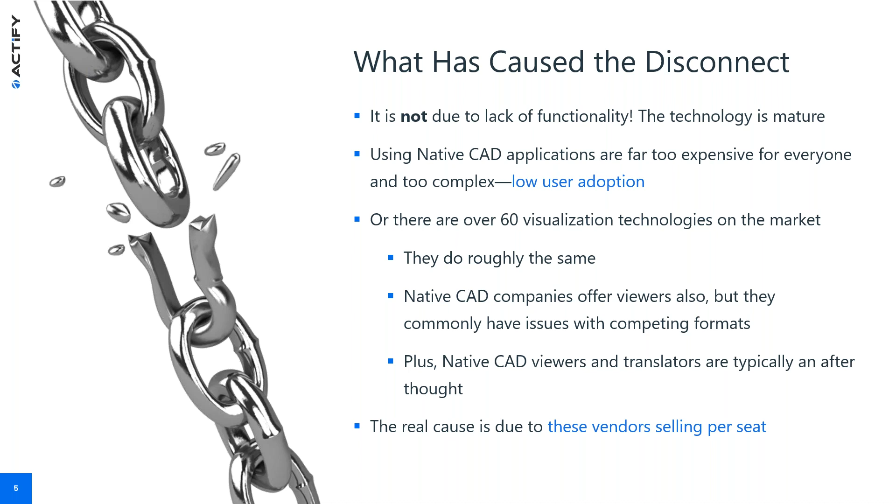So what does this mean to you? You forego goals, you ask who can go without, you limit access to product knowledge. Without access, users, managers find small budgets to buy from vendors of their choice to solve a niche problem. I've seen where companies have multiple vendors across the entire organization and they're unable to collaborate. Again, the real cause is that the typical vendors sell on a per seat basis and not an enterprise level. So they're limiting who gets access to the product data.

Traditionally, viewers have been licensed to a single workstation or concurrent user group. This has restricted access to users with the most immediate need. Actify's SpinFire Enterprise solution provides access to everyone, every device within an organization, which can be defined as a location, a division, or again, the entire enterprise.

When access to SpinFire is unlimited, sales teams mark up designs while meeting with their customers. Manufacturing and quality teams can check specifications and tolerances on the shop floor. And now everyone has design access to the design information. They truly do have a single version of the truth.

What if you could have employees access SpinFire at work, on the road, or at home to maximize productivity? Access SpinFire on every computer from the shop floor to the top floor corporate-wide. Access in conference rooms by interns, temps, consultants, management, and others. What if you could let everyone collaborate openly and measure from the same version of the truth? What would that mean for your business?

We have a lot of companies taking advantage of SpinFire Enterprise solution. I've seen where a company went from just a handful of users to over 20 plus users in a matter of a month's time. They're finding ways to get other individuals involved, and this is just one example.

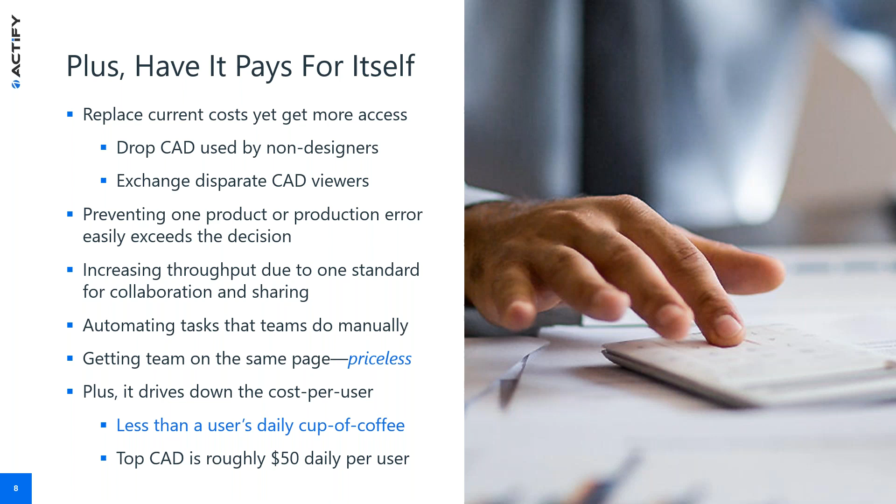Here's an example of one of our SpinFire Enterprise customers and the cost savings they've seen after purchasing SpinFire Enterprise. They're a tier 1 automotive supplier with 4 tech centers. They were able to terminate 43 native CAD licenses and gained unlimited SpinFire access at work, on the road, or at home. This supplier saved over $200,000 in annual costs by terminating those 43 native CAD licenses, and they were able to standardize on a vendor-neutral platform.

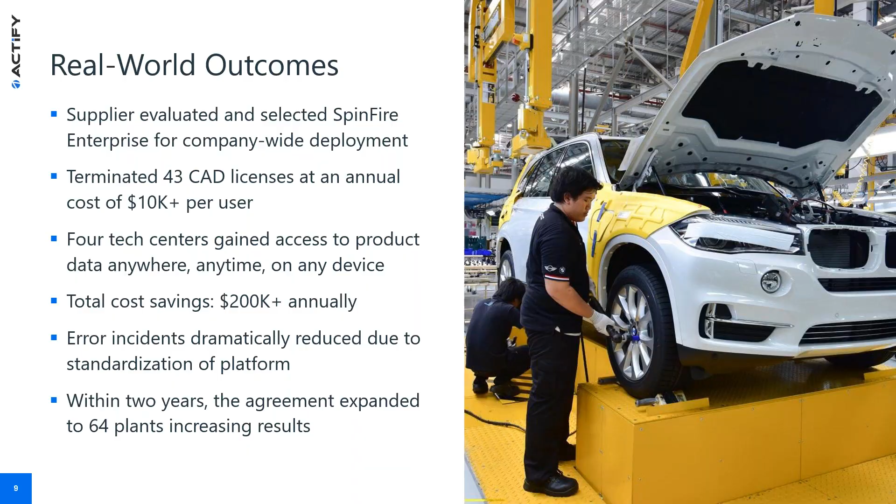Here's one comment from one of our customers using SpinFire Enterprise: 'Without special training, you can easily open, measure, and check data and important files. You can share your data with colleagues and customers.' The key takeaway here is it's one solution for the whole company.

Another product we recently announced is our CAD Publishing solution. The purpose of CAD Publishing is to publish data from a native CAD file for downstream use. Like SpinFire, it handles multiple native CAD formats and allows your organization to convert those CAD files, whether a single part or an assembly from a designated folder, into other formats like SpinFire Ultimate, an image or thumbnail, or formats like STEP, IGES, JT, and others.

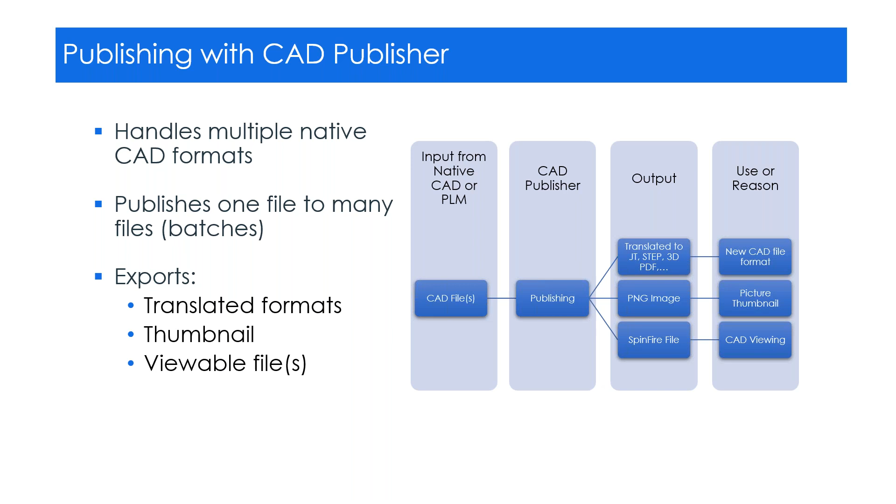To get started, I wanted to make a couple of announcements with SpinFire. We wanted to provide you a resource where you can find some information and links: help.actify.com. Here you can find the latest release notes, recommended hardware specs for your computers, as well as information about all the functions in SpinFire that you can search through.

So, with some important notes for announcements: the prerequisite for installing SpinFire is to have the .NET Framework 4.8 installed. If your Windows updates are already up to date, then you should already have that, so you shouldn't have to worry about it. But that is a prereq for using the latest version of SpinFire.

If you're using a floating license with SpinFire, starting with 11.9.0, the next major release, we would suggest that you upgrade that floating license manager to 11.9.0. In the past, we've always provided a 32-bit version and a 64-bit version to install SpinFire. Starting with 11.9.0, that 32-bit installation will no longer be available.

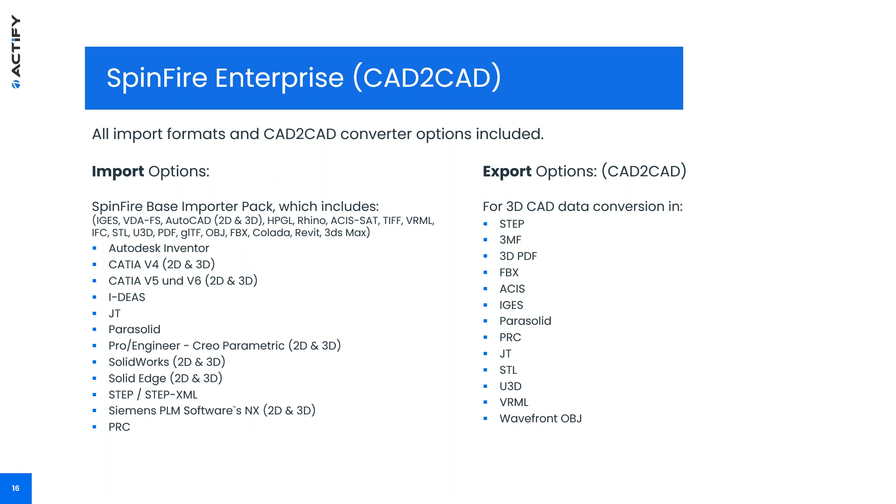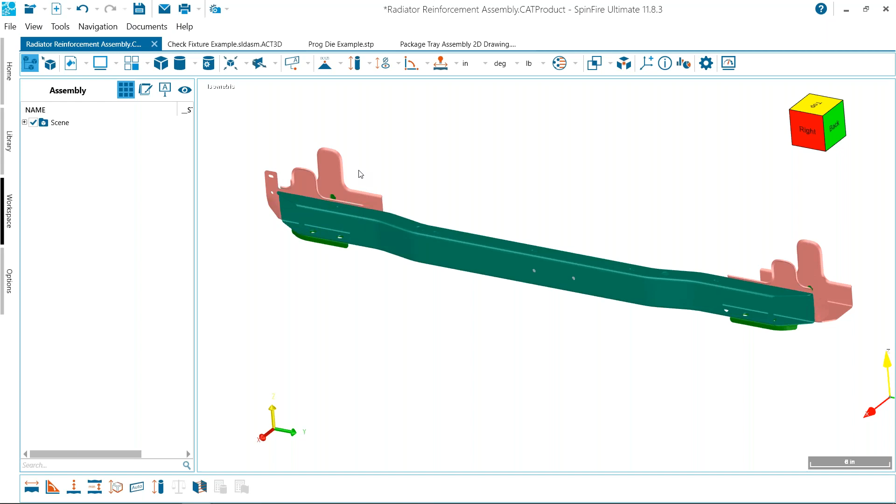Just to reiterate what I showed you in the PowerPoint slides, we have the File Export menu, and with the CAD to CAD module, you have all these different formats you can export to. So for this radiator reinforcement assembly, if I wanted to export it as a STEP file, I'll go to File, Export, STEP, and then a menu appears giving you options to choose what information to export, like whether to include the metadata built into the CAD data.

The format, I can switch to AP 203, 214, and 242, but 214 is the de facto standard. So if you were to share STEP files outside your organization, the recommendation is always AP 214.

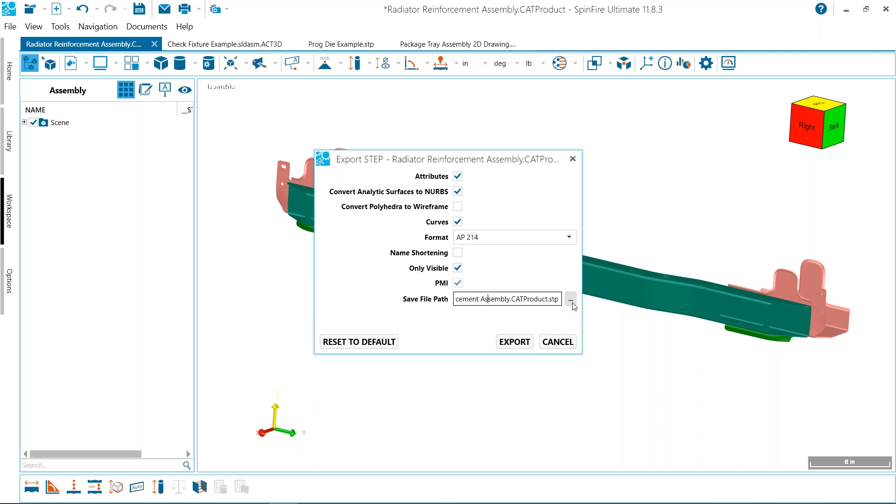The save file path will default to the location where the file is currently located. If I wanted to change the location or file name, I could type it in here, or click this browse button, which opens the file navigator to give it a file name and folder location, and then choose the type, whether that's a STEP file or a compressed STEP file format.

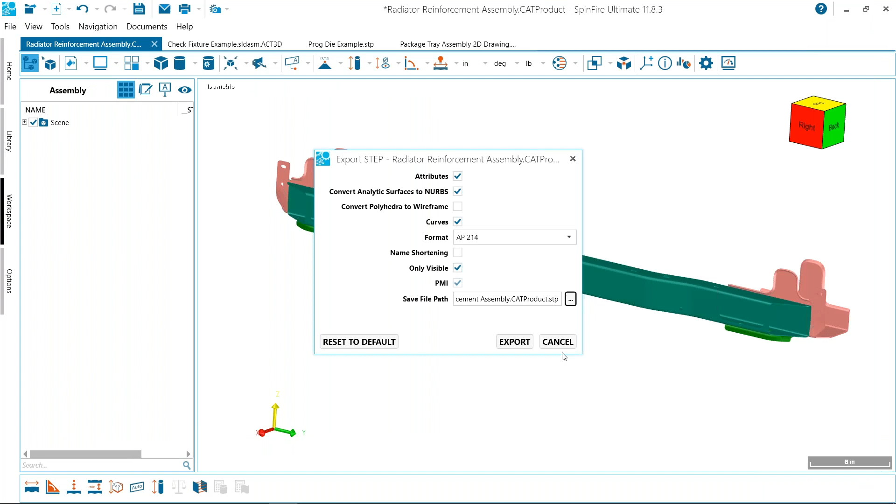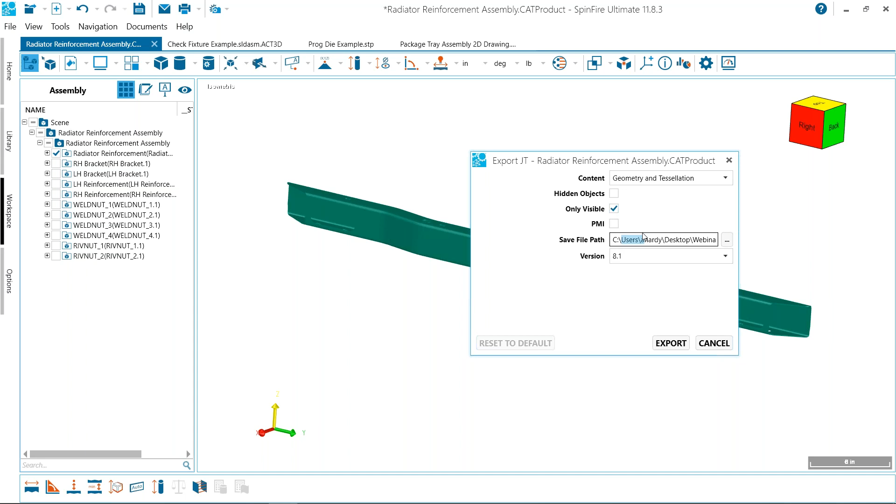In addition, we can export to other formats. Another example here is JT. Let's say I want to show only this part - I'll go to Export JT and choose to export only the visible items. Again, that gives you the file path and file name where I want to save it, defaulting to the location of the original file. If I click Export, that will translate that data to JT format.

We also have our library, which gives you a way to navigate your folders or network drive. You can add a connection, which helps bookmark folder locations so you don't have to go digging through folders on your computer.

So let's say I want to go to this example where this Aquo Bottle is, and convert this lid. I could simply right-click on that part and click Convert, and this Convert menu will allow me to convert to multiple formats at once.

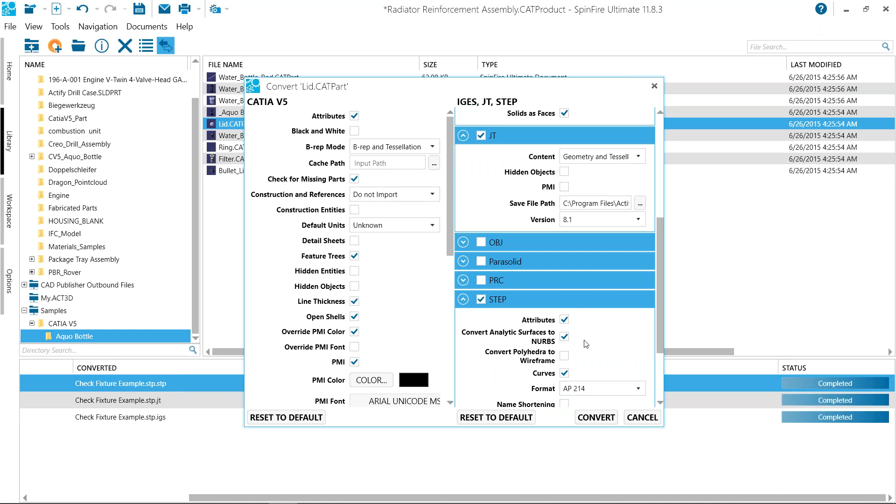So I can say I want to create an IGES file, a JT file, and a STEP file, include the attributes and PMI data if there's any, and then click Convert. That brings up the progress at the bottom for this Lid.CATPart and the formats it's converting to - STEP, JT, IGES - and the progress shows completed. I'll refresh this, and you'll see the new files are now generated right here.

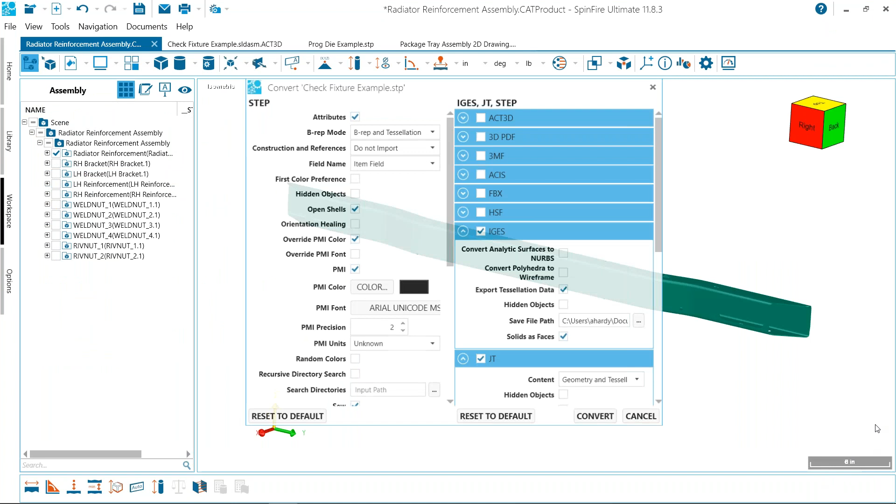Similarly, I could go to File, Convert, and then point to one of those models and click Open. This is a way to convert files without actually having to open the file into a workspace, converting those files straight from the Convert menu.

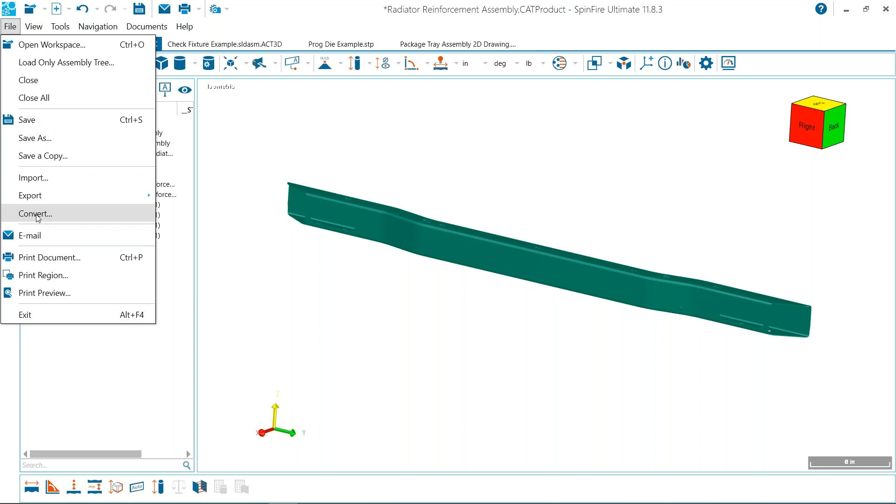Whereas if I go to File, Export, that's taking the current workspace I have open to convert and export those files to these different formats. The Convert menu allows you to browse to the file location and select those different formats, again without having to open up a workspace for that file, so it just saves some time.

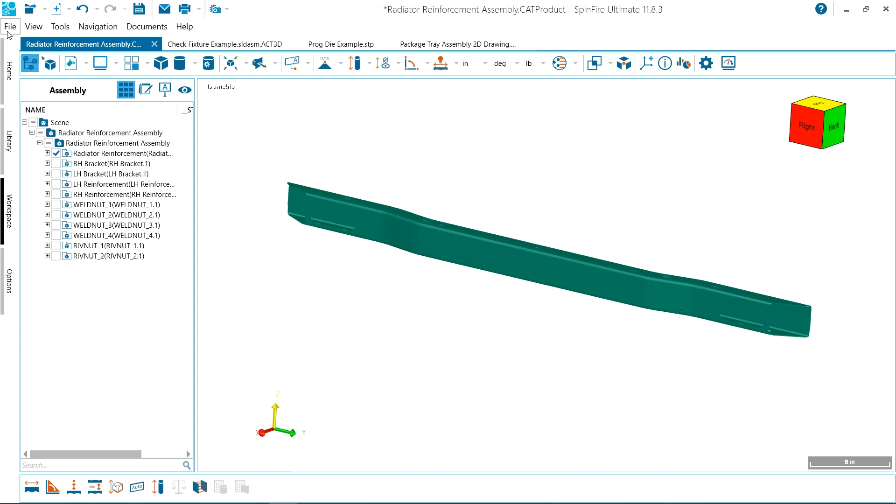We also have some features here to export images, hard copies, and parts lists. So let's take, for example, a 2D drawing. I can export that as an image.

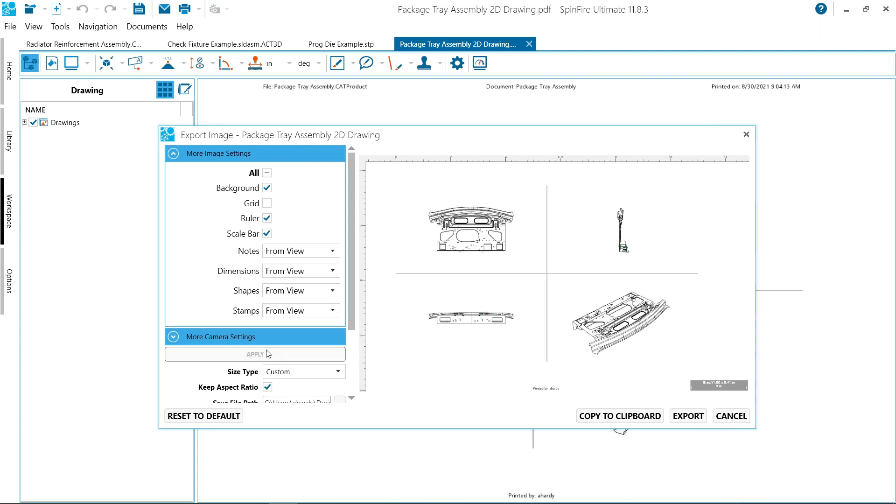Again, it gives me this menu with the save file path. I can also choose whether I want to include the colored background, whatever colors are in that workspace, and the scale bar or ruler, then click apply after making that change. Now you see the ruler on the top and the left-hand side here.

You can control the size of that image, and with this save file path, if I click the browse button, I can then choose what image format I want to convert it to.

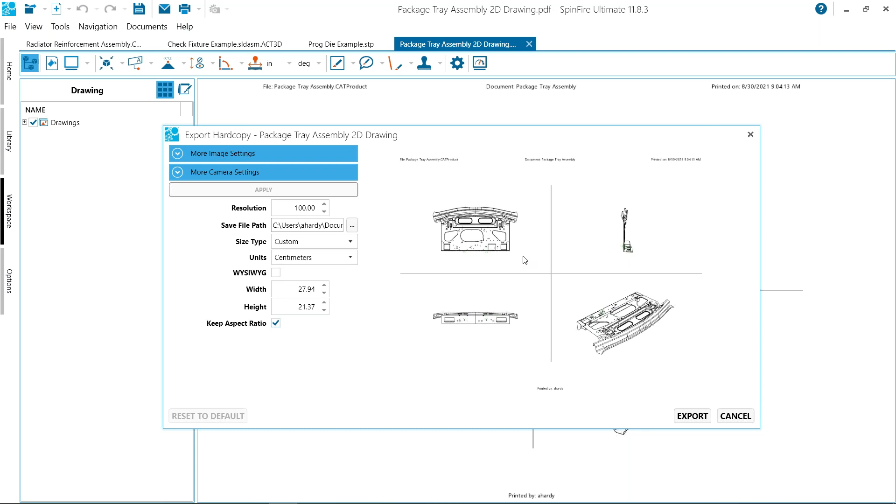With the hard copy, this will create a crisp 2D PDF document. So it converts, let's say, your AutoCAD drawing, your CAT drawing from CATIA, or your NX drawing, and converts that to a 2D PDF document. This is the suggested way to export it as a hard copy, so it saves it as a vectorized print, where the lines are much more clear as opposed to being pixelated.

We also have the ability to export a parts list. I'll go to File, Export Parts List. Here we get a preview of the entire assembly tree structure and the quantity.

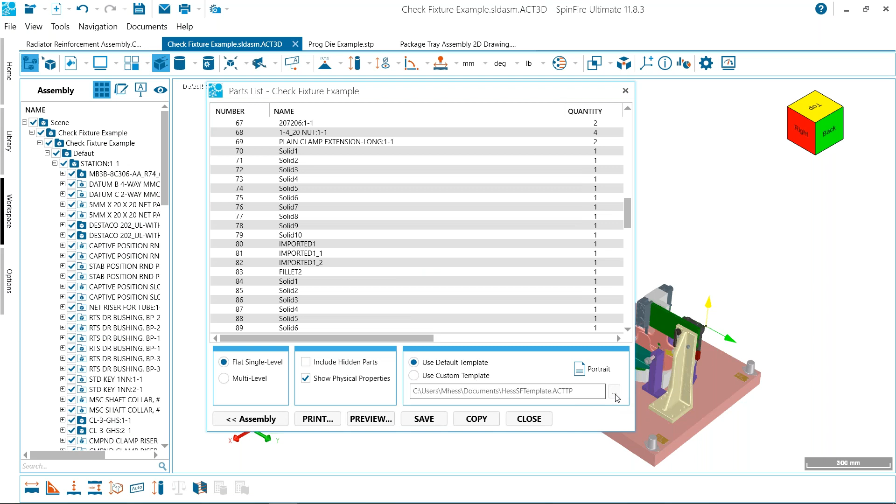I could also choose to show physical properties, which will include additional columns for that data. Once that's finished calculating, I can click Save, and save it as a text file, CSV, XML, or an Excel spreadsheet.

In addition to exporting as a parts list, I could also go to my parts properties chart and export a BOM list with all the additional attribute information. So if there was property data or material information built into that CAD model, you can include that as well when exporting it as a spreadsheet.

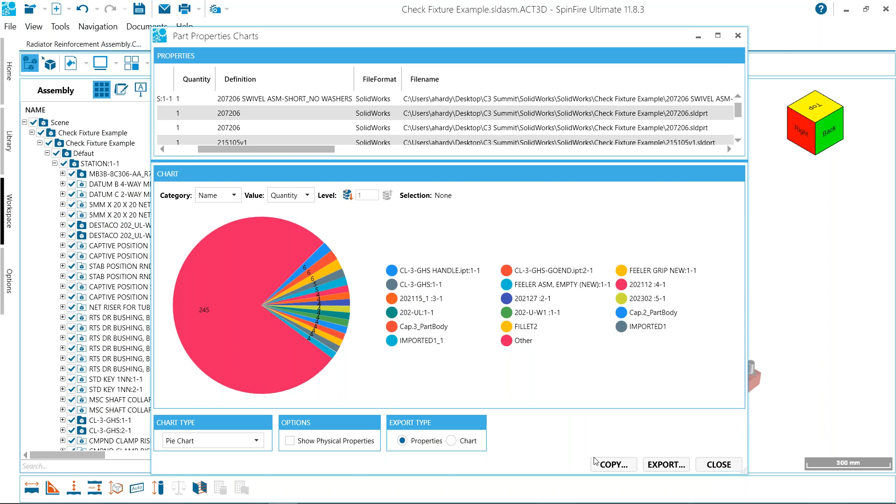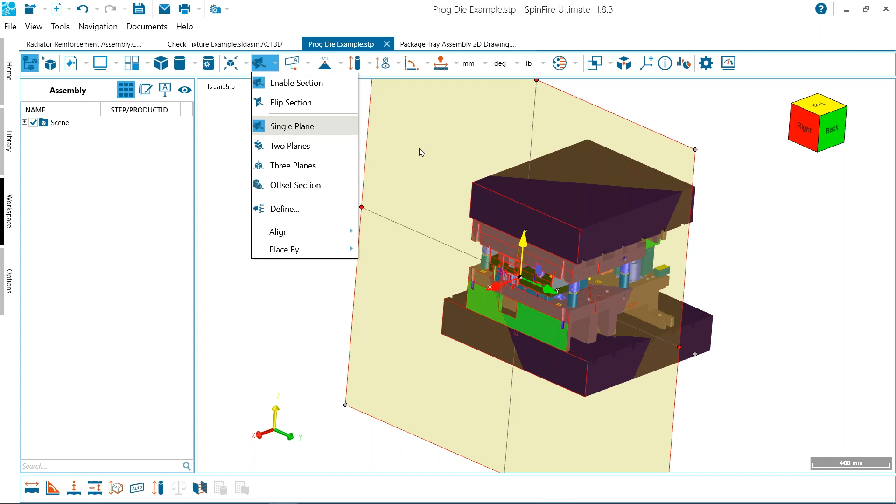We also have the ability to export from a section cut. So if I enable this section cut, let's say I want to export a 2D image of that section cut. I'll turn on my section plane, and then with this plane visible, I'll right click on it and select Create 2D Document, which automatically creates this 2D document built into the workspace.

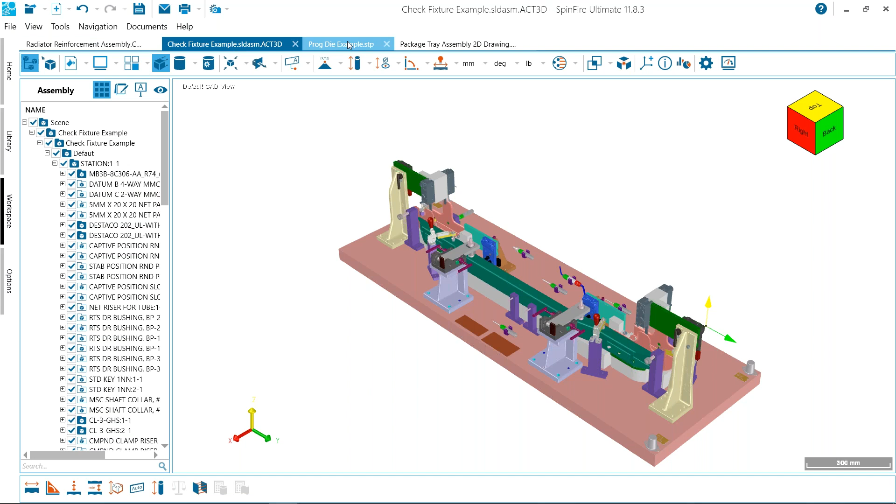Just to differentiate between these tabs, these are the four different workspaces I have open. In the Prog Die example, here is the 3D workspace. When I created that 2D document, it embedded it automatically into that workspace as a separate tab. So a lot of times if you're opening a native CAD file, there might be a 3D tab and a 2D tab, for example.

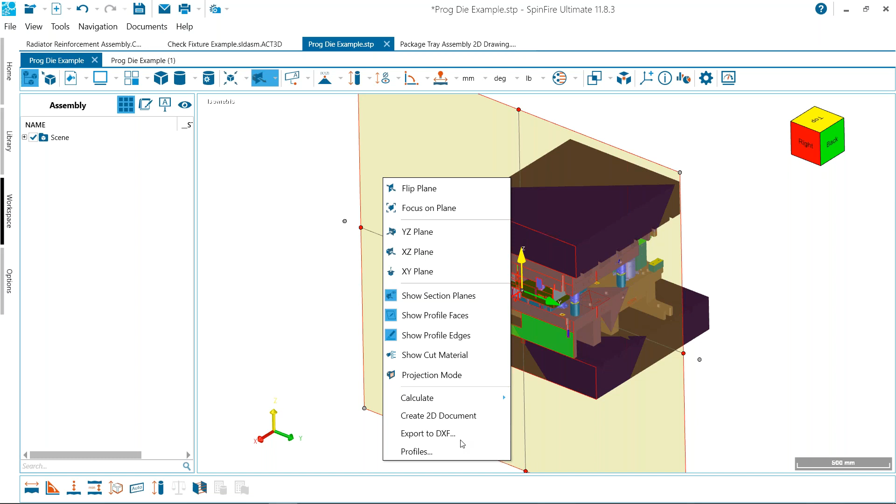In addition, I could right click and maybe export a DXF file of that printout. So let's save it to this folder as a DXF file. That automatically just created this DXF file right here.

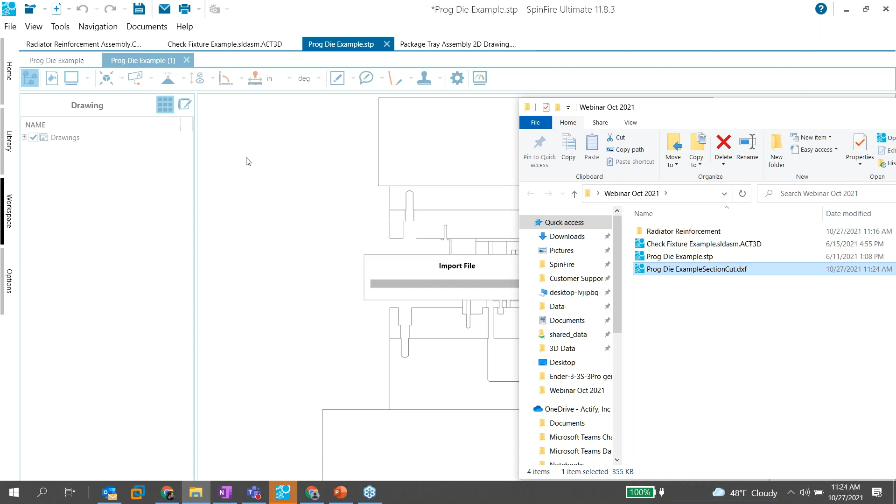If I drag and drop that into this workspace, it'll ask me if I want to continue with importing it. I'll click OK, just the model. And it's just another way of creating that 2D document of that section cut.

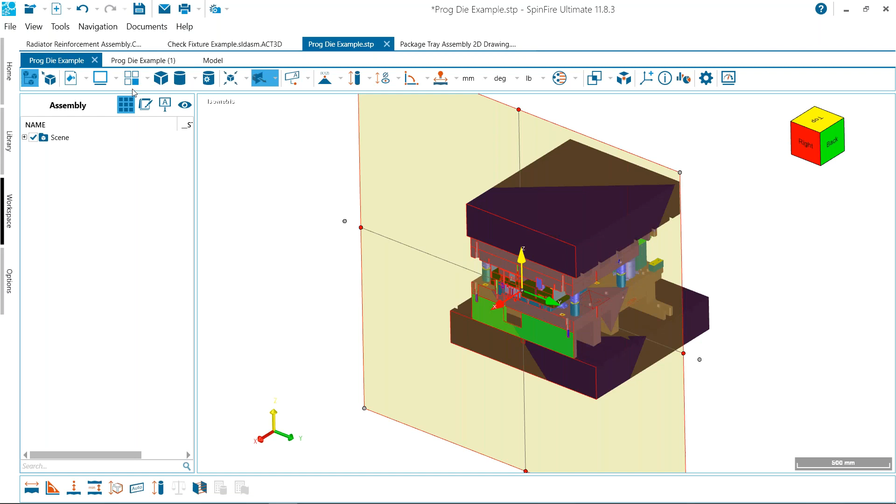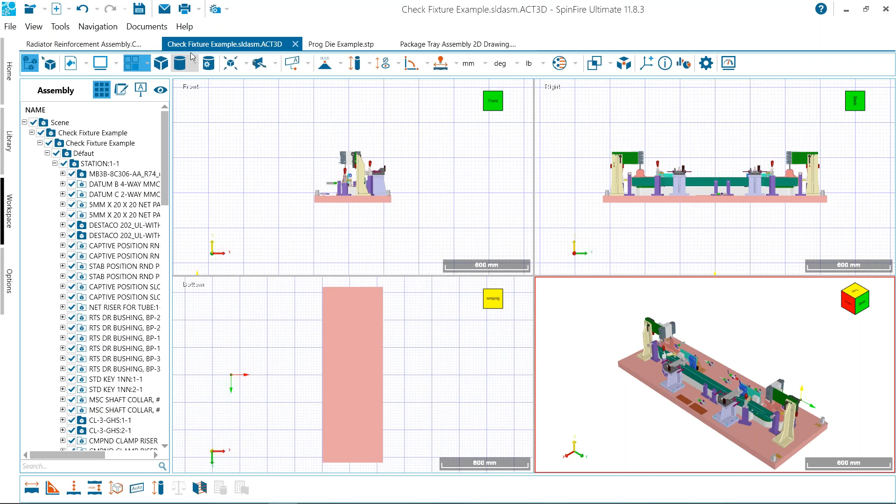We also have this quad view. So let's say you want to do a 2D printout of all the different side views. Just toggling over to the side view or quad view can give it that look. You can control the rendering style, remove the grid, and get something like this as an end result, just to give it a 2D look and feel, and then you can add measurements to that as well.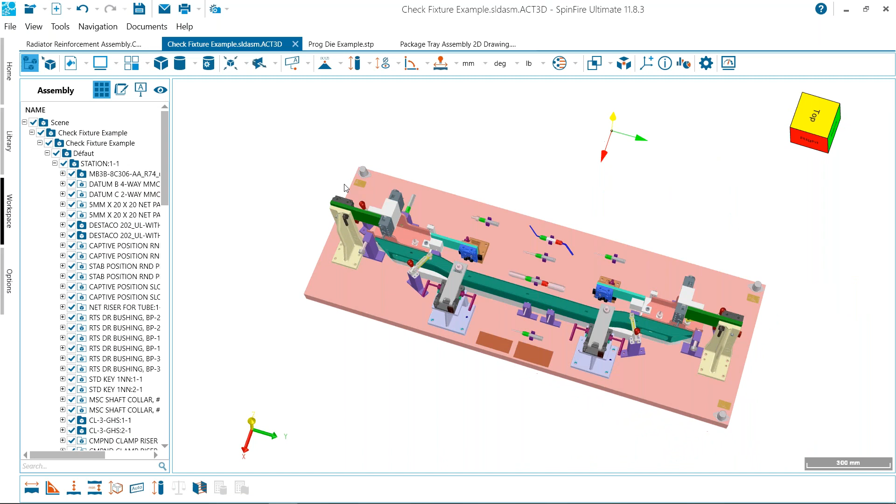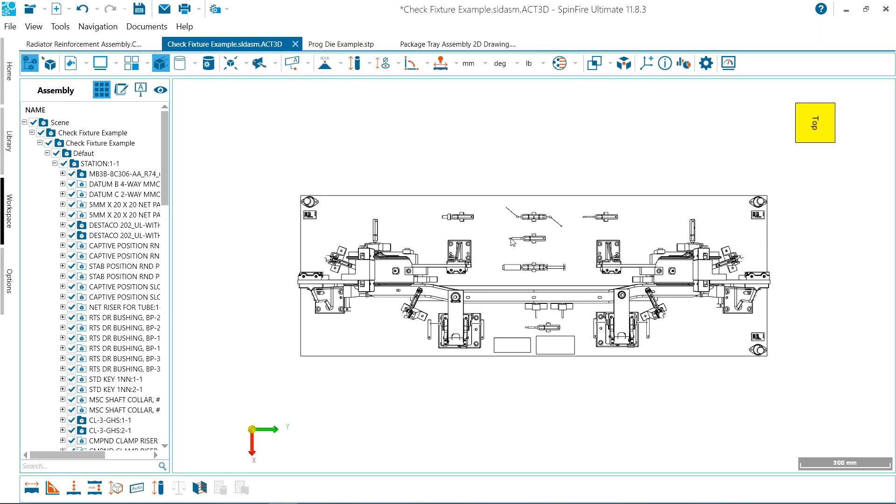When looking at this CAD model and wanting to do a clean printout, let's say I want the hidden lines removed so it looks more 2D. It might have a problem with just a perspective mode where you want it to be more aligned, so then you'd want to toggle that to parallel mode. Then I could take this and export it as an image.

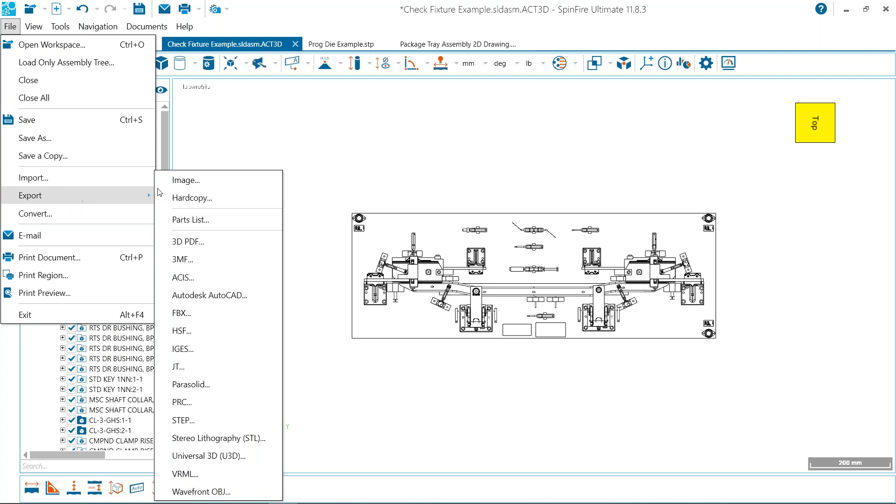Okay, that's all we had planned for today. So I will hand this back over to Todd.